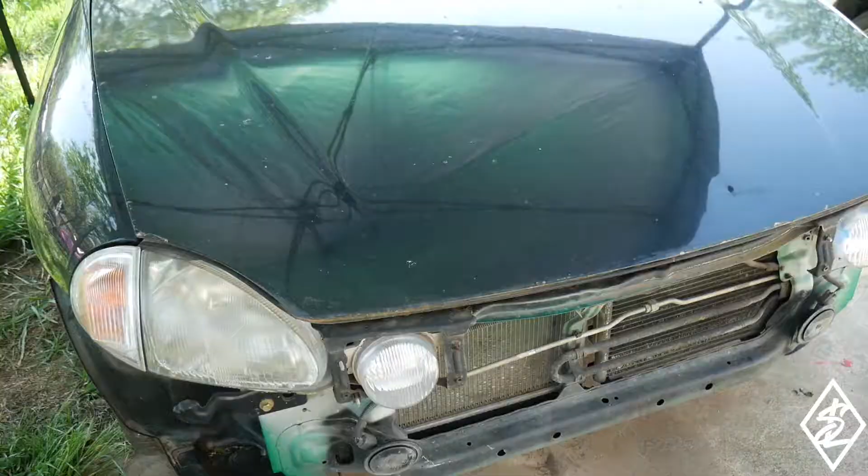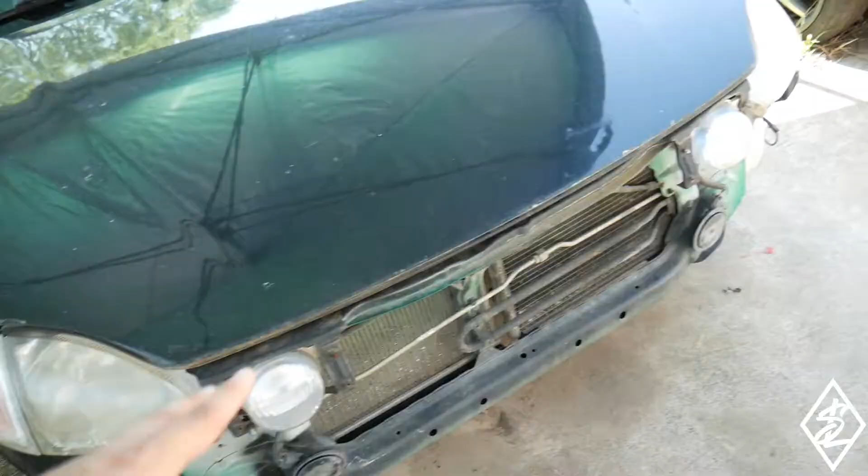Okay guys, so here we are, the Del Sol. Need to go ahead and start working on this front end. I need to take off the front radiator support, and that is going to be done by taking off these spot welds. There's probably going to be a lot of them, just gotta take it off. Of course I do gotta take off the headlights, the fenders, the little stuff here and there, the cooler for the power steering, the lines for the AC, all that good stuff.

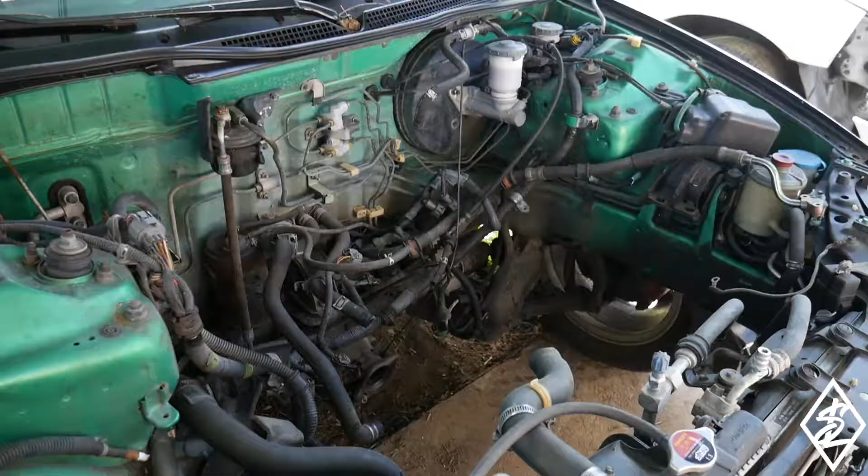Then we'll get started on drilling out the spot welds. That's going to take a little bit of time. Engine bay looking a bit nasty, but you know, I've seen worse, not too bad. I'm going to get started on that right now. Shouldn't be too hard. Let's get at it.

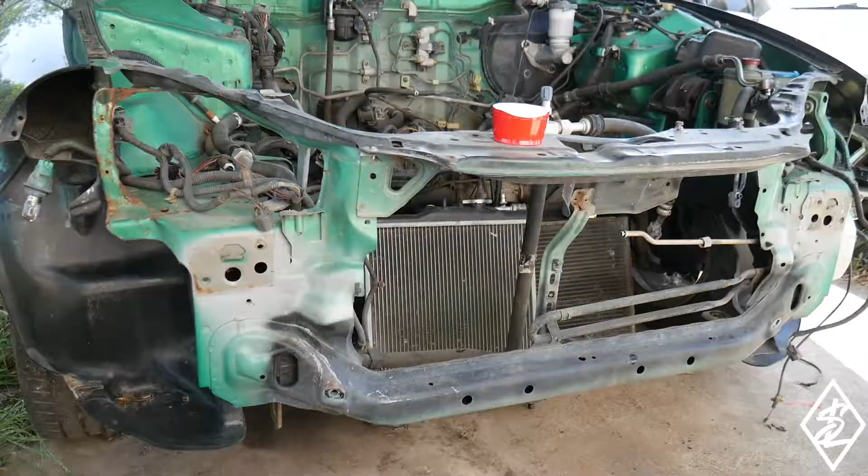I got everything off of this core support, and now it's ready to go ahead and start working on it, take off the spot welds and get this thing completely off of here.

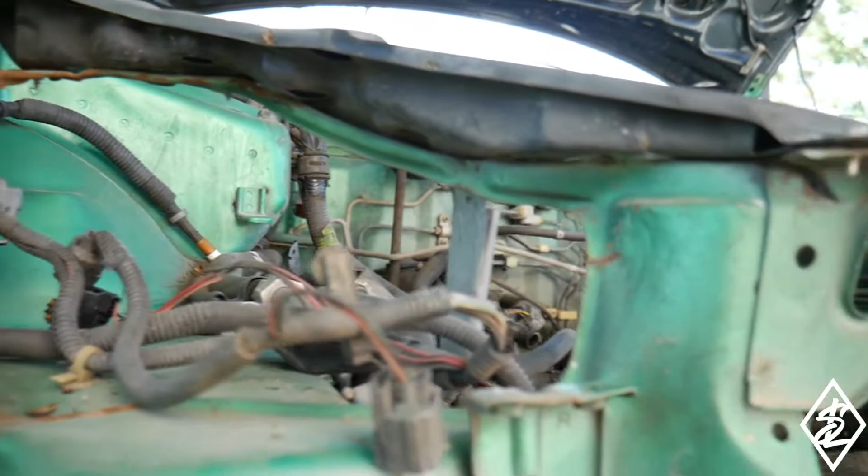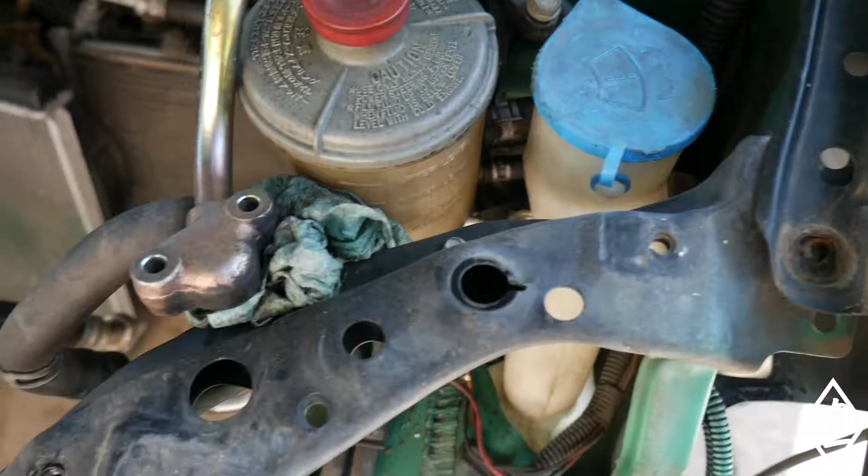You guys could tell it's been in some sort of accident, and they tried to beat it straight. See, and then here it just doesn't really look that good at all. And even right here, this is probably the worst fitting area. But you can see the core support, and it looks like they grabbed a top section of a core support and just tried to drill it onto there.

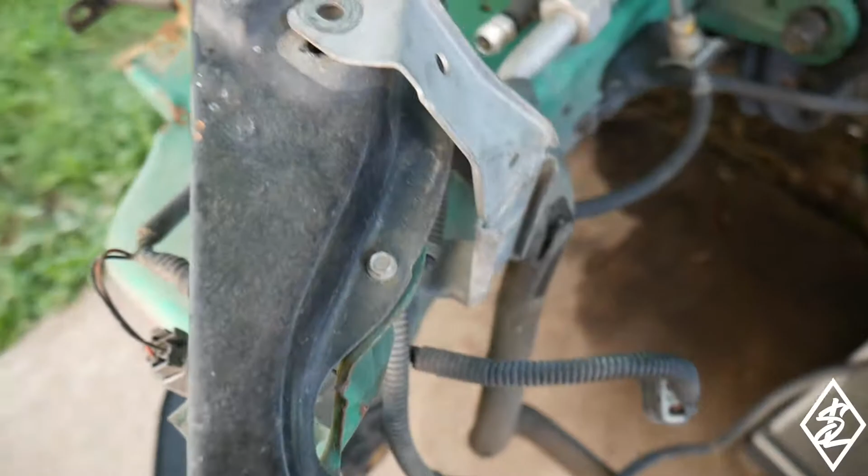There were screws in here as well. I actually took them out, but you could see right here they have a screw, and they did have two other screws in here also, but I did take those out because again, we're going to be taking this completely off, and that's kind of sandwiching it together. So now for how I'm going to be taking this off, they do sell drill bits for this job.

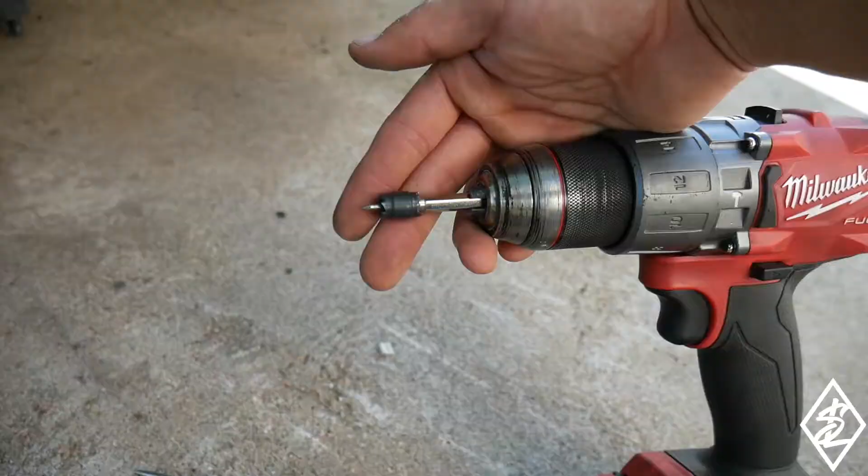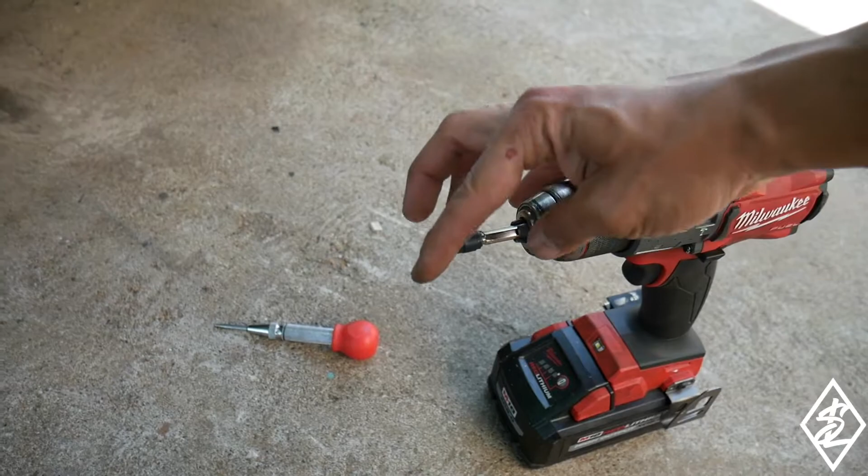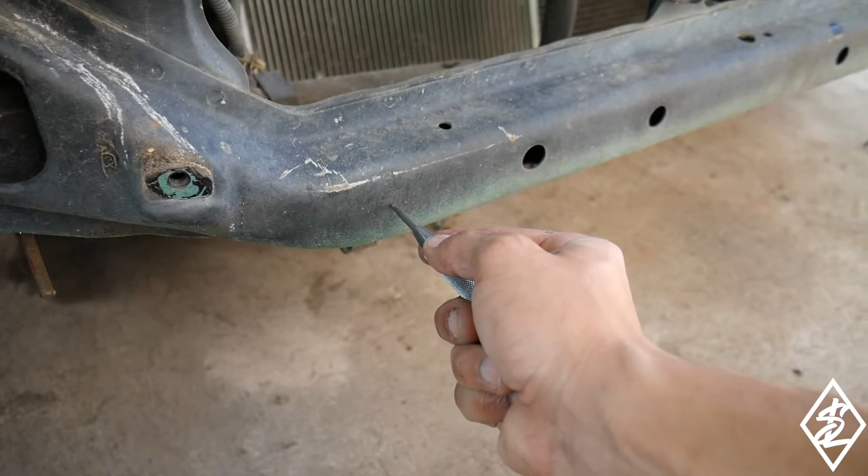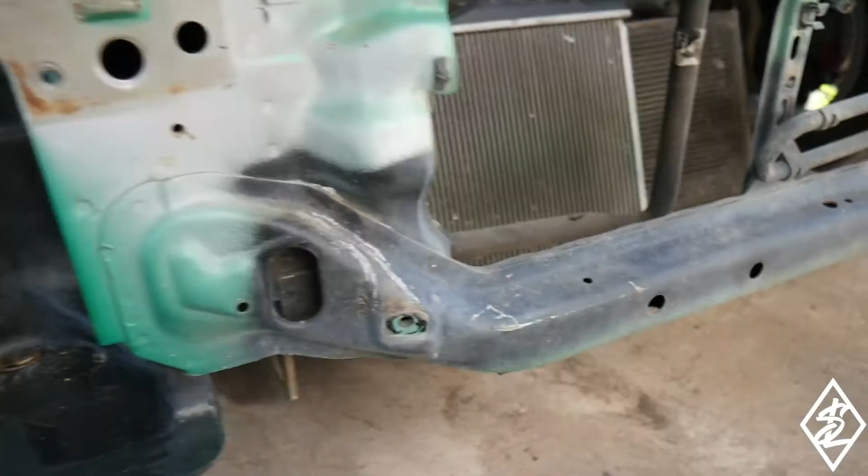It has like a center punch, and then it has the teeth on there to take out that spot weld. So in order to make sure it's straight, because you don't want that thing traveling around off center and not get the spot weld completely centered, this is a center punch. You put it exactly in the middle, push it all the way, and it indents right in the center, or wherever you put it, hopefully the center. What that does is now I have a center point to put the drill on, and it won't just wander around. I'm gonna have to do that on all the spot welds to get them completely out.

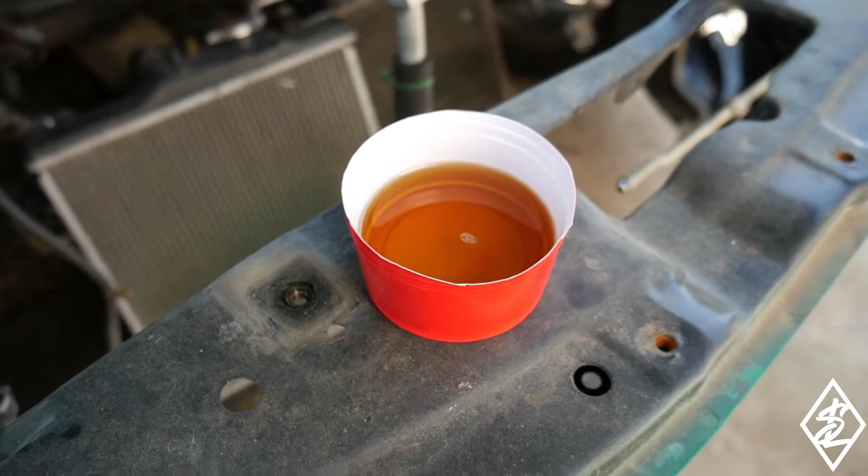On these drill bits, it does come with another bit on there. This one's used, and I broke the other side, so you could just reverse them, flip them around. Let me get started on this, it's going to take quite a while. I have some oil over here which will help aid in the cutting and the heat process. You want to make sure you put oil on there, it cuts a lot better with the oil.

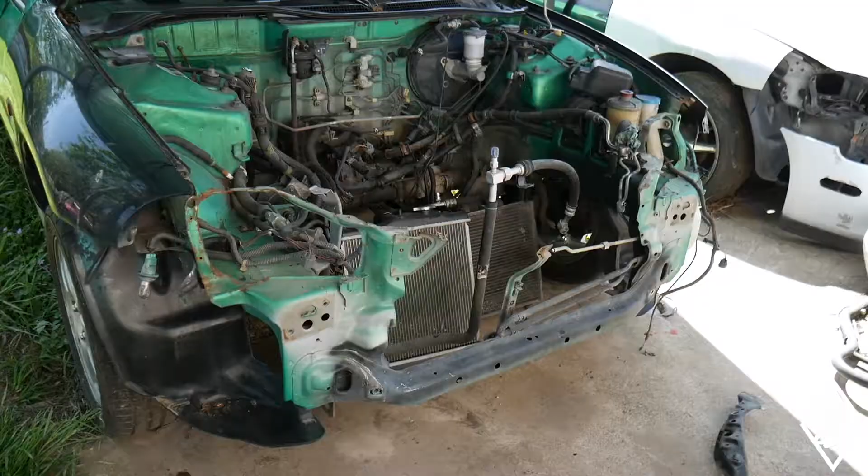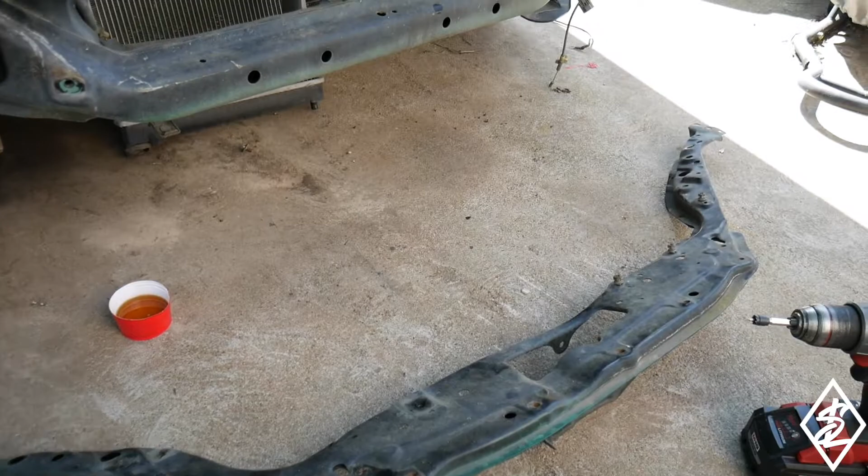Okay, so I was gonna get started on drilling, but then I decided it might as well just take off the top section. It came completely off, just taking a few screws, and so that's how it looks. They try to do a cheap little repair. I mean, I guess you gotta do what you gotta do with what you have, right? But I'm going to just take the rest of this off, and hopefully we get some good measurements here.

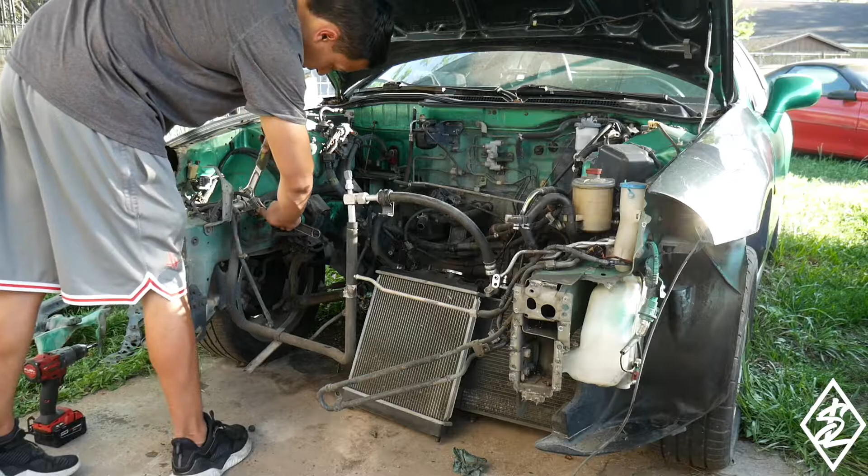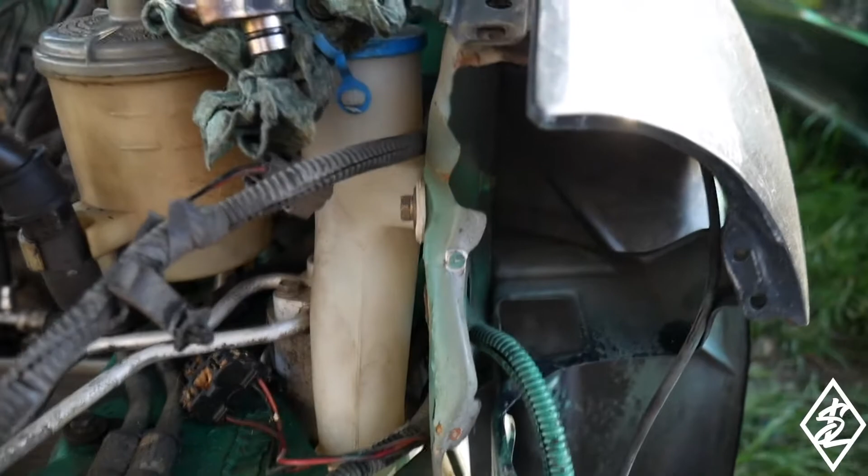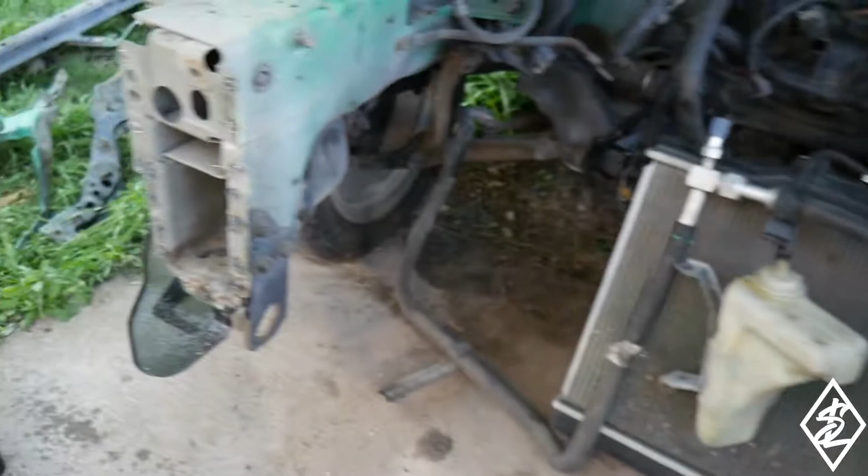Alright guys, so I got the front radiator support completely off. You could see the spot welds I had to take off. This one actually came off on its own, and then you see all the other spot welds I had to get to. On this other side also, we have some friends here. Don't worry guys, I'll make sure they have a proper burial. You see all the spot welds on there also.

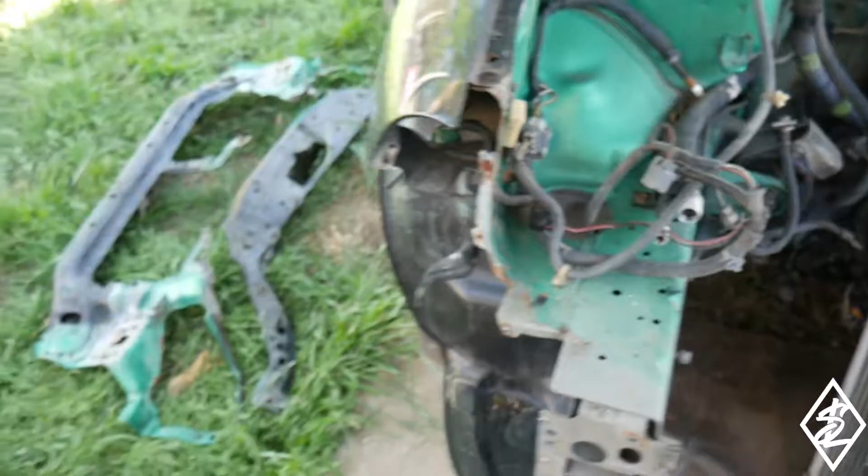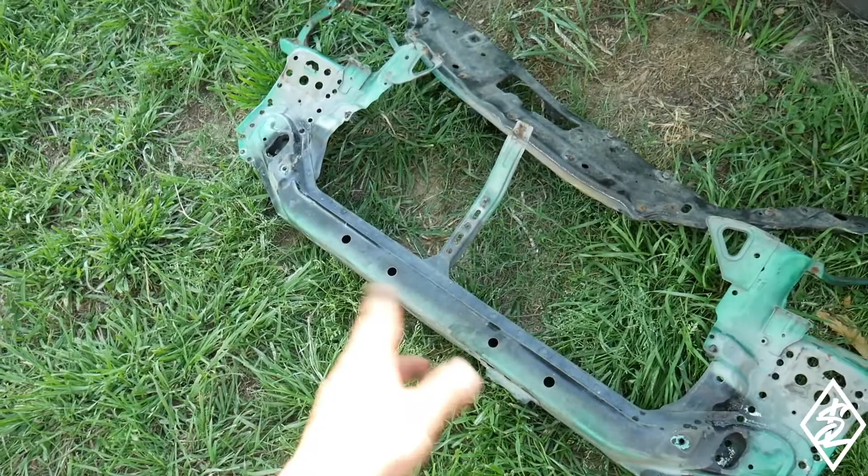So here is the radiator support right here. The only good section on this would actually be the crossbar right here for the radiator, and that is actually pretty straight, but the rest is all crumpled up, and they just try to bend it back together. Actually might need to use that lower cross section, because on the USDM one it looks like they try to jack it up from there and bent it.

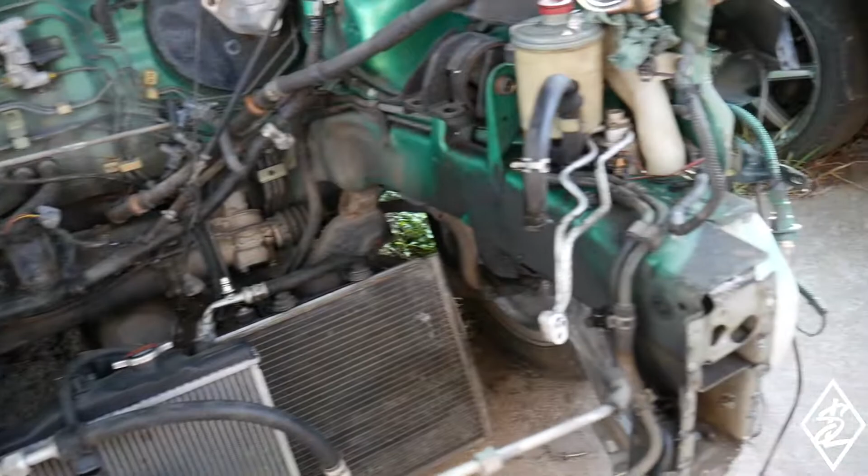I would like to have it nice and straight. The sheet metal over here next to the headlights looked like it was crumpled before. The rails look pretty good. I still got to measure it to be sure exactly, but you see the sheet metal also on there. So I'm not really worried about the sheet metal, the rails is really what's going to count here.

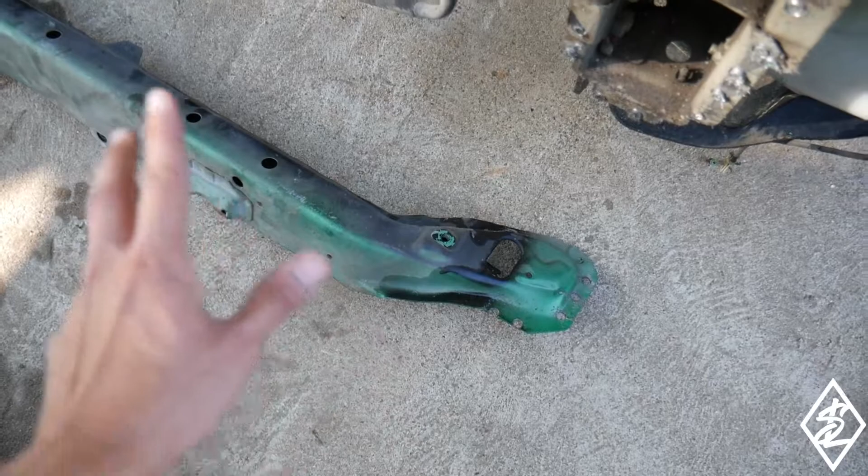Okay, so it's the next morning. I did manage to take off the lower section of the core support because I am going to need that, but I'll show you that later. It was just like 4 additional spot welds I had to take off, and that came completely off.

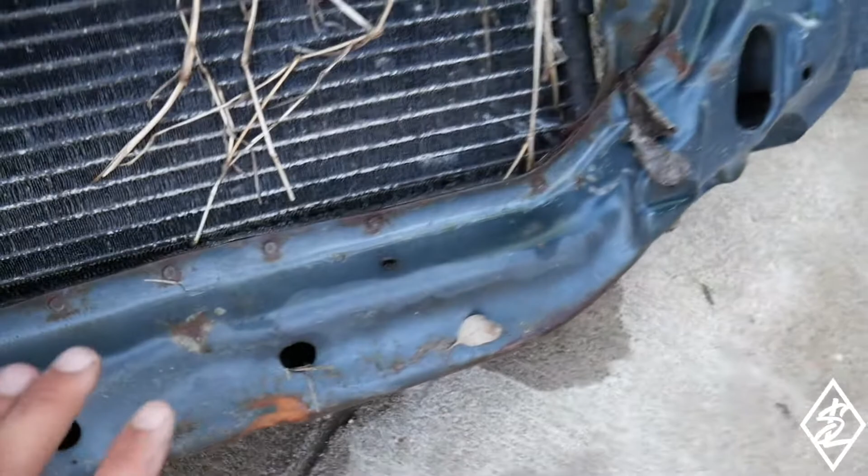Here's the JDM front end, what I was talking about. Looks like they try to jack it up or something, and then it just kind of unspot welded by itself right there. I need to take everything off, it has been sitting for quite a while. I'm gonna get the condenser off, the radiator, all the little bit of wiring, and then we'll start on the spot welds on this one too.

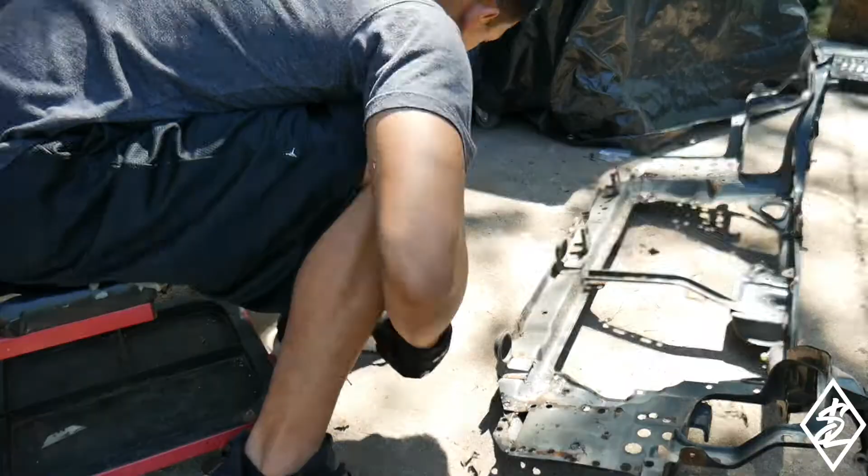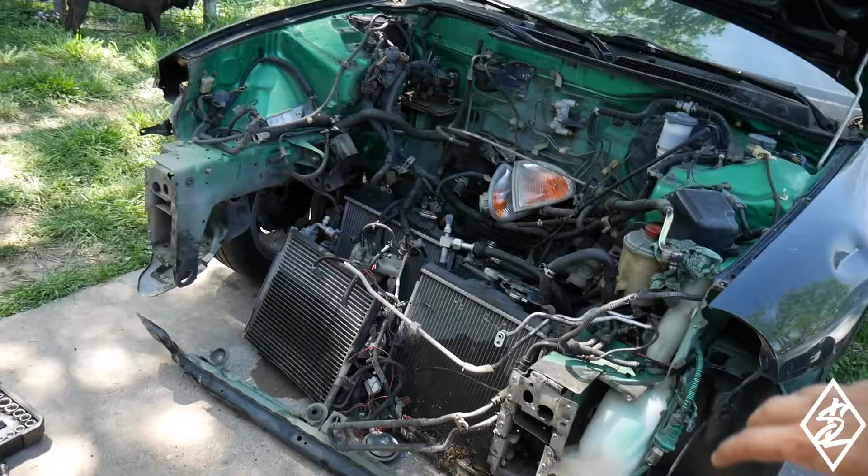But now right here I just have the extra parts that I'm not using, and I gotta decide what I'm gonna use and what not. Everything I'm actually gonna be posting on my eBay.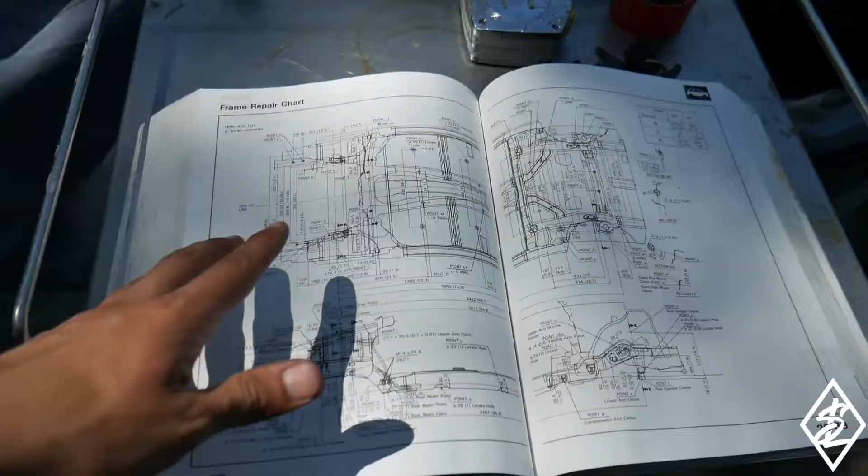Here is a factory service manual. You could go ahead and pick one of these up off of eBay, or probably get a digital download online. But here's the frame repair chart, in millimeters and inches, giving us all the reference points on what the measurements should be. So I'm just going to take a look at this.

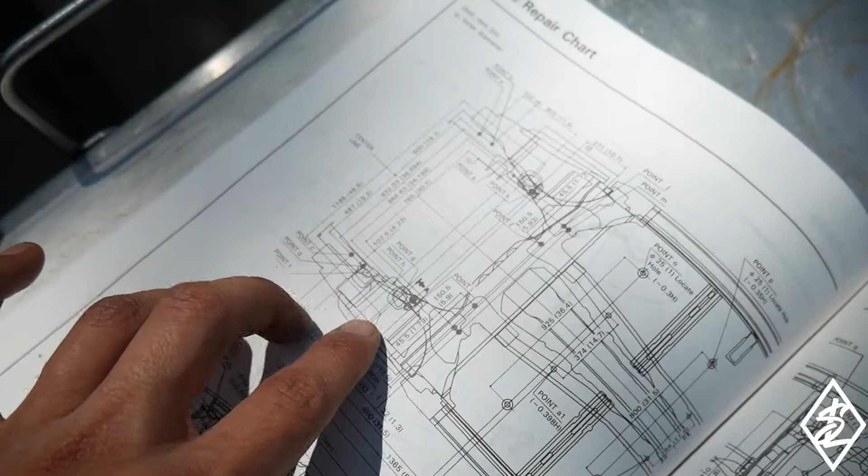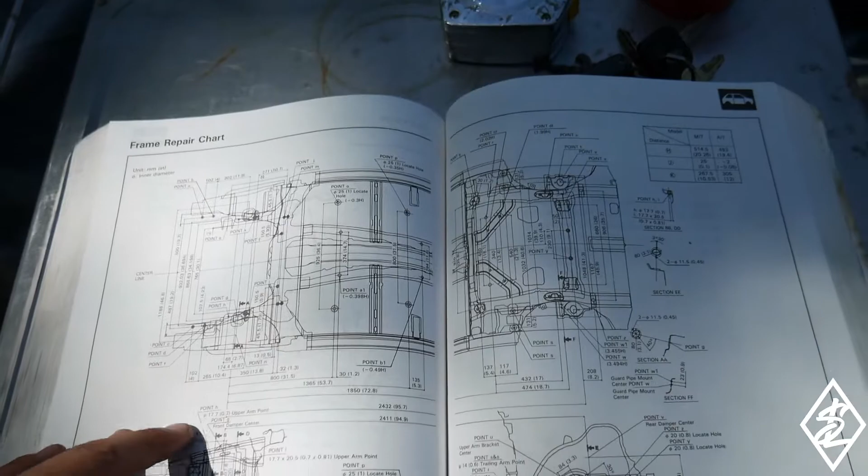I do have a tape measure right here, and I'll just try to see if the frame is straight for the most part, and see if it has to be tweaked in any sort of way. There are other measurements on here if you guys do need them, but these are the main ones you will need in case of an accident or whatever. So let me go ahead and get started on this, and we'll see if everything aligns.

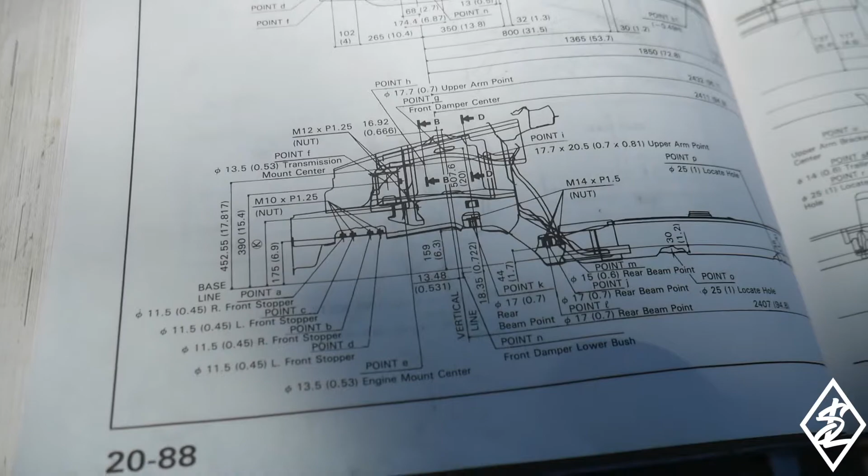I did as much measurements as I felt like I could have done. I measured from the middle of the frame rails to each frame rail, and it was within the spec. I also checked up and down, since sometimes they'll bend upwards or downwards if it gets hit, and the measurements came back right to spec. I don't believe these frame rails are bent in any sort of way, but I do have this sheet metal right here. To me, that's not going to be an issue, I could go ahead and take care of that.

And now I do have the front core support, so it's looking like a go here with the Del Sol, and we could start moving forward with it. It's going to get pretty exciting because we're going to get a lot of modifications, a lot of restoration, and I'm pretty sure you guys are going to learn a lot of stuff along the way.

Alright guys, so there we have it. Took off the radiator support on the Del Sol, and made sure the frame is straight so we have a solid car to work on.